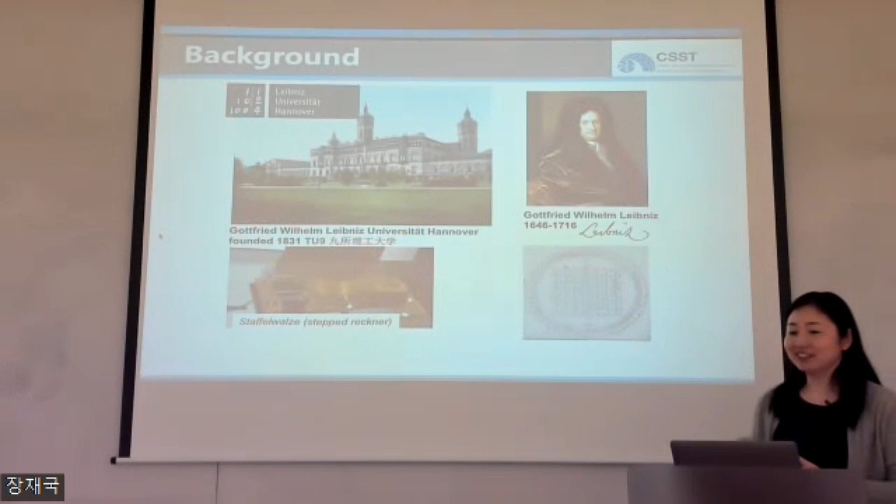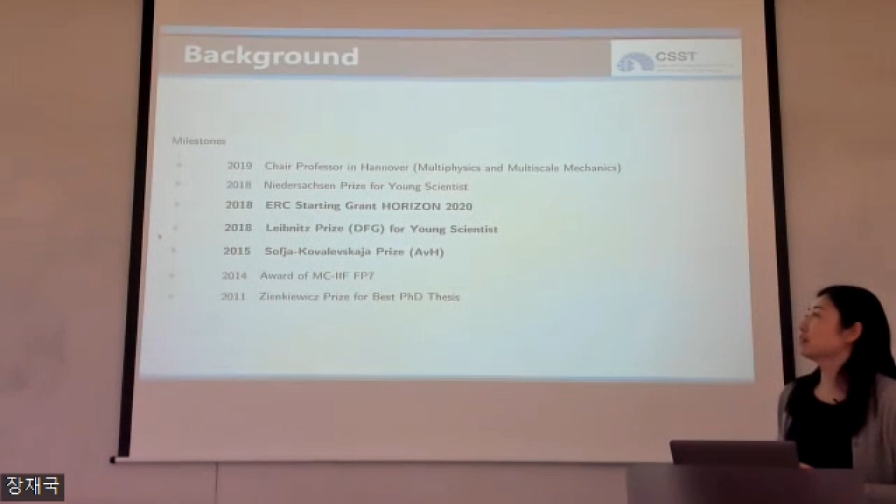About my background, I did my PhD in computational mechanics. I'm always telling my students, even though I'm in the mathematics and physics department, my background is in mechanics, so I'm neither mathematician nor physicist. I moved to Germany in 2015 with the Sofja Kovalevskaja Prize from the Alexander von Humboldt Foundation, and I became professor in 2019. I moved from Shanghai to the UK, then to Norway, and then to Germany.

I have an ongoing ERC Starting Grant on nano-energy harvesters utilizing flexoelectricity and piezoelectricity for self-powered medical implants. So far I've graduated 5 PhD students in Germany. This is a Chinese student, and we had the online defense in hybrid form. And this is my other PhD student who works on machine learning. The isoparametric or parametric machine learning is actually from Ming.

And yeah, if you know Pedro Arias, I don't know. Yeah. Is that him? Oh my God, Pedro Arias. Wow. Yeah, so he came to Hanover. And this is Professor Chen Li from Swansea University, also well known in computational mechanics. Say.

And I'm also supporting young researchers in my group. I'm hosting a Humboldt Fellow. If you're interested in applying for a talent program or fellowship in Europe, there are 3 types. The first is the Humboldt Fellowship from the Alexander von Humboldt Foundation in Germany. The second is the Marie Curie Fellowship, which is also prestigious, from the European Union. And the third is the Newton Fellowship from the UK.

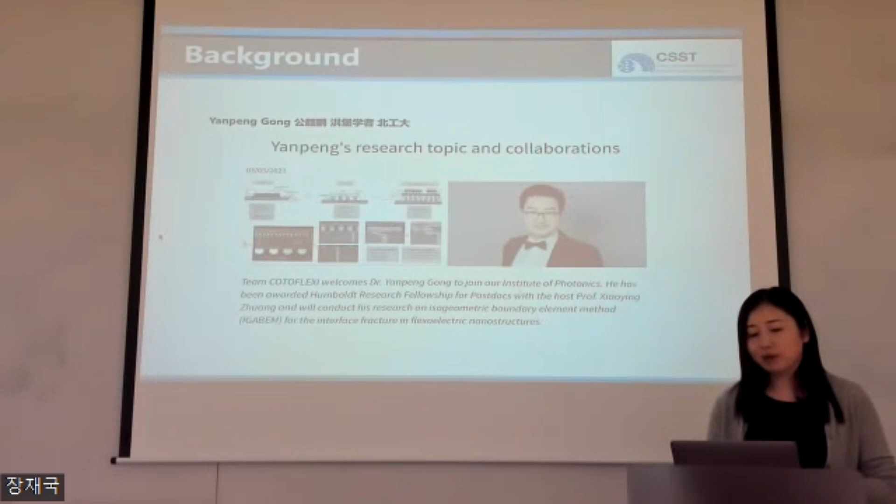In my group, I have one Humboldt Fellow. He's from Beijing Institute of Technology, and he's working on a contact problem with thermal-electromechanical fields coupled together, with the isogeometric boundary element method. I'm also hosting Teresa Cheng. She was originally from Australia, Queensland University of Technology.

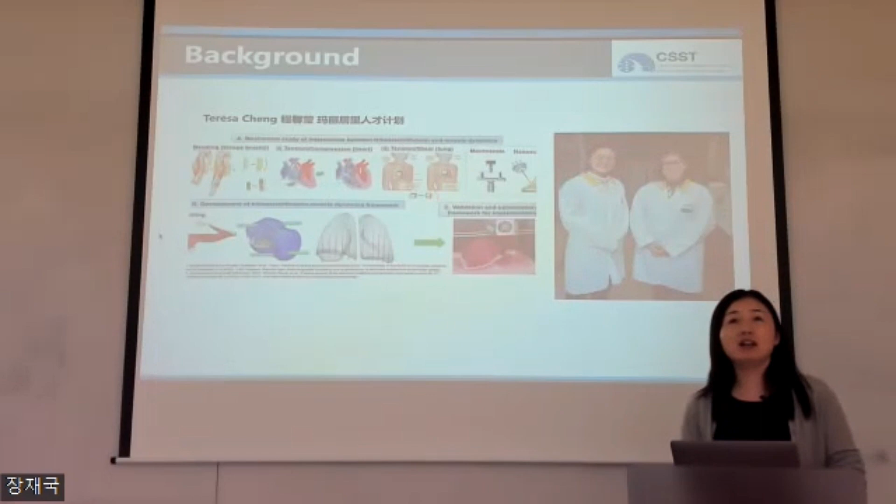She's working on the triboelectric energy harvester, where we can convert muscle contraction and body movement energy and store it in a capacitor through triboelectricity. Her background combines biomechanics, experiments, and simulation. And she actually got the highest score, 98.8, in 2021, and she's in my group.

So I changed my title today because Professor Lee told me he would prefer the metamaterial topic more than the flexoelectric nano-energy harvester, so I was modifying my slides. I want to give you some background. He said that so many people talk about metamaterials nowadays. It is true. But metamaterial is actually a very wide umbrella word, and people talk about metamaterials in very different contexts, meaning actually different things.

If you talk to physicists about metamaterials, they are mainly focusing on the photonic, so electromagnetic wave manipulating, for example, cloaking materials. And that's very different from what we are talking about, mainly in mechanical civil engineering. That's mechanical metamaterials. And if you talk to people working in condensed matter physics, they're actually working on wave attenuation or phonons. So I'm really talking about elastic wave attenuation, that's phononic metamaterials.

And some of the letters are in Chinese because some of them were presented before in a conference in China, and I want to translate it to make the audience understand better.

For the mechanical metamaterials, folks know about it. There's auxetic metamaterials. That means the Poisson's ratio is negative. It's actually a structural effect because there is no natural continuum material that has negative Poisson's ratio. The Poisson's ratio is always positive. When you have negative Poisson's ratio, the auxetic effect is usually coming from the structural effect. So you design a spatial topology, and you have man-made artificial materials that show unusual properties.

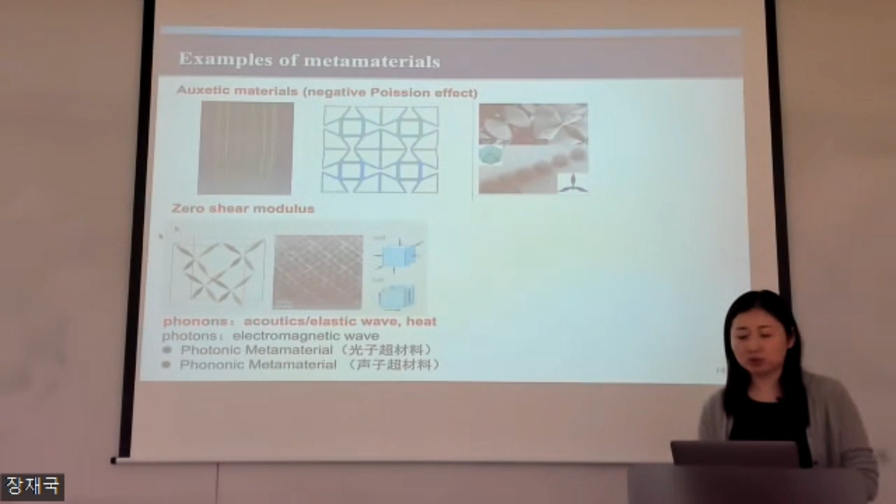You have this hinge that has zero stiffness, and you have no rotation stiffness. So when you give the shear force, it's behaving like fluid. We know that fluid is almost incompressible, and it cannot resist shear force. So it is soft in shear loading. There are many different fields that metamaterials can modulate: acoustic or elastic wave or heat, because heat and elastic wave can both be classified as phonons, while the electromagnetic belongs to the photons.

And this is a review paper from Extreme Mechanics Letters journal, where they gave a review of the different groups of materials, and they showed there's limitations in a bigger picture of different materials, from graphene elastomers to ultralight metallic materials and so on. The traditional materials have a parallel line for their limit for Young's modulus, and there are more graphs, more properties, like also for the tensile strengths and so on.

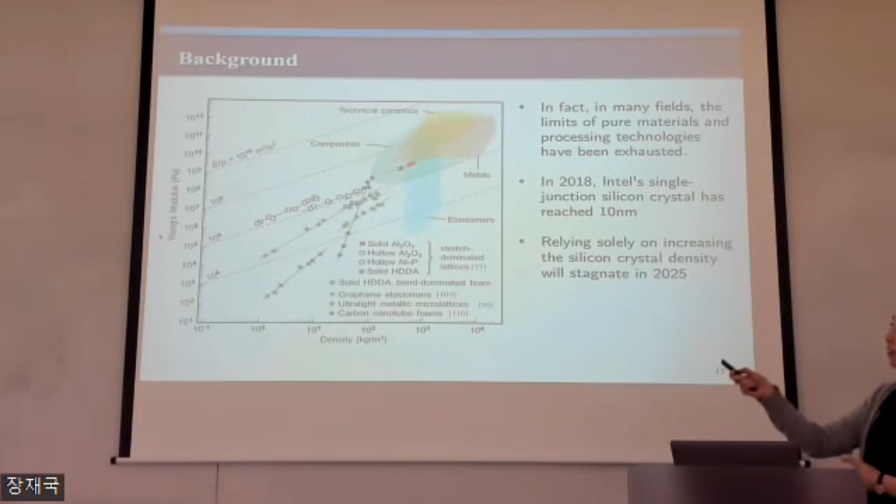So in fact, in many areas, the materials limit has already been exhausted. That's why engineers are trying to go beyond the current limit of materials by engineering materials to find new topology, new features through materials engineering. And this is the case for mechanical metamaterials, like in this review paper. It is the same also for the semiconductor industry.

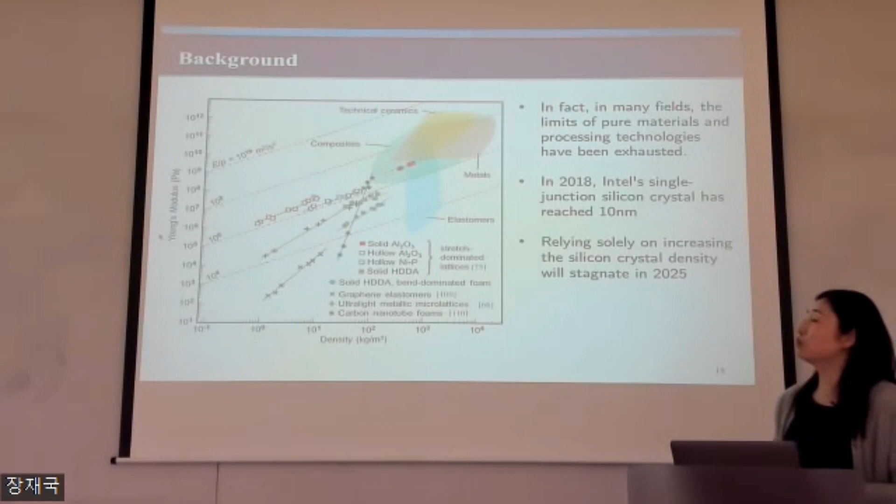There are non-physical rules like Moore's law. Moore's law is not a physical rule, it's just a prediction for the growth of the density of the transistors in the chip, that every 2 years the cost will reduce and the density of the transistors in the chip will double. So the non-physical law governing the semiconductor industry has died out. There is stagnation in development around 2010, and the density of the chip transistors has flattened out. So it's also going to the limit. And the silicon crystals have really reached the manufacturing limit of 10 nanometers.

So for mechanical metamaterials, my group is looking at the auxetic metamaterials and also the phononic metamaterials, including topological insulators. I give the emphasis of this architectured structure because architectured structure was also one of the key areas in the guideline from the National Science Foundation in the US. They listed the key research areas in the future, and one of them is architectured materials.

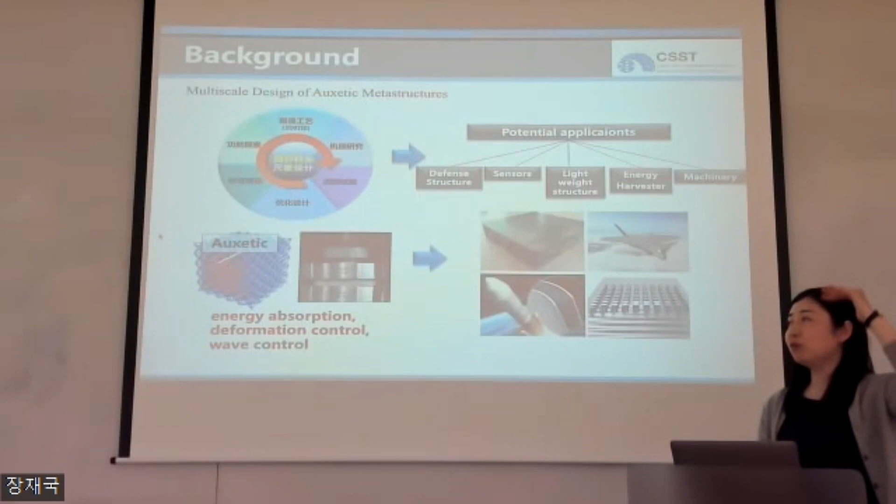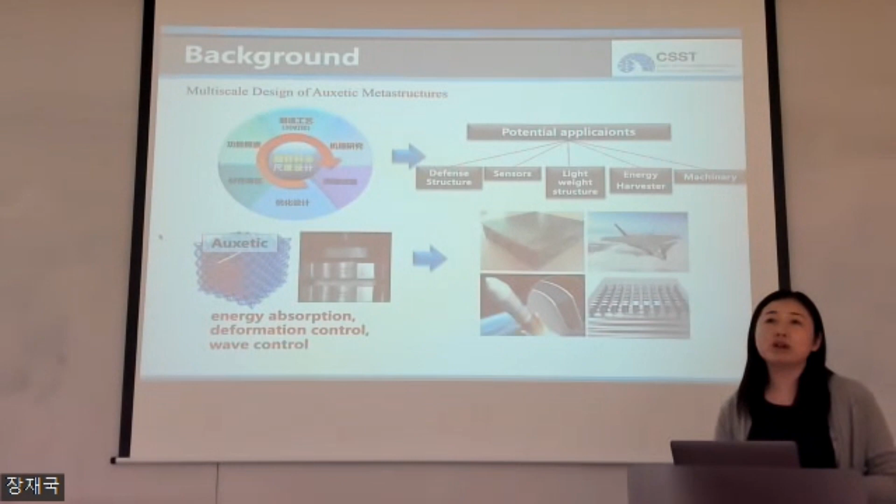For example, you can design auxetic cores in the middle so that you can program the failure processes. It can be used, for example, in energy absorption and deformation control in different structures. You can also use it for wave control or wave attenuation. There are many potential applications for mechanical metamaterials, for defense structures, for sensors. Also, you can enhance signals. You can amplify signals with a substrate.

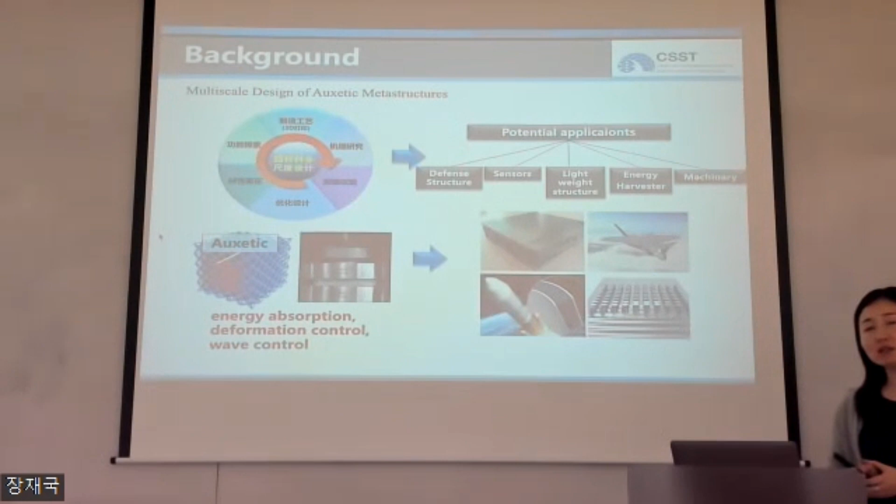And also there's lightweight structures, for example, metal foam, composites, and also energy harvesters. You can try to guide the wave in certain directions so that you can maximize the energy efficiency for energy harvesting. It can also be used for machinery. Indeed, metamaterial development, exploring new metamaterials, is an international trend. For civil engineering, there is also a common goal, and different big initiatives are underway in different countries, also in Germany.

People want to explore new material functions, and they want to reduce the materials, less materials. And also they want to have energy reductions as the international research trend. So you can see here is in Stuttgart, they have been working together with Max Planck Institute, where they want to have the digitalization, Industry 4.0, to automate the lightweight structures.

So they have these woven structures in the middle to reduce the material use and weight for non-load bearing, like you have lots of walls or separation structures in the building. They have a demonstration building, and they also build some lightweight structures in Harvard campus using this new type of woven structures, which is manufactured by robots.

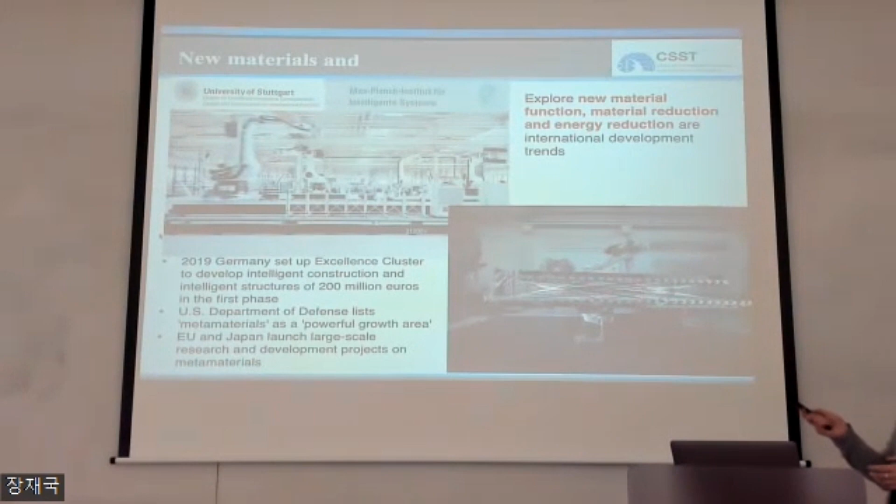So in 2019, Germany set up an excellence cluster for developing intelligent construction. And the first phase like 200 million, and it's extended further for another 7 years. So the excellence cluster in Germany is usually 7 years, another 7 years, and maximum 3 phases. So each phase is between 200 million to 400 million.

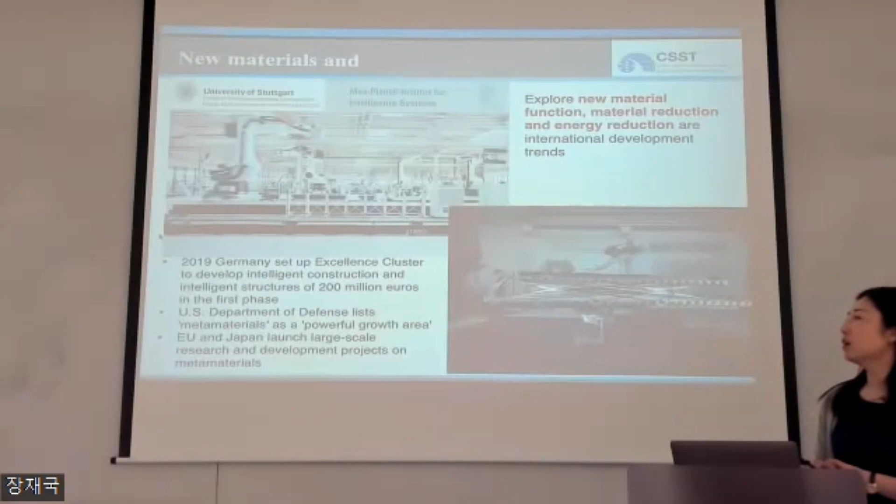Aachen, they also obtained digitalization in civil engineering and architecture for 400 million euros, and they started in 2020. And in the US department, they exploit metamaterials for different structures, and EU, Japan, they all have listed metamaterials as their future key development area.

In this talk, I want to focus on the elastic wave attenuation, with special interest for geotechnical engineering for underground structures. And this is a picture for the underground structure complex in one of the big cities, Hangzhou in China, that's located in East China. So usually in city, we have really limited space for urban development for both above ground and underground. You have so little spaces between the metro line and underground facilities, parking places, and the buildings.

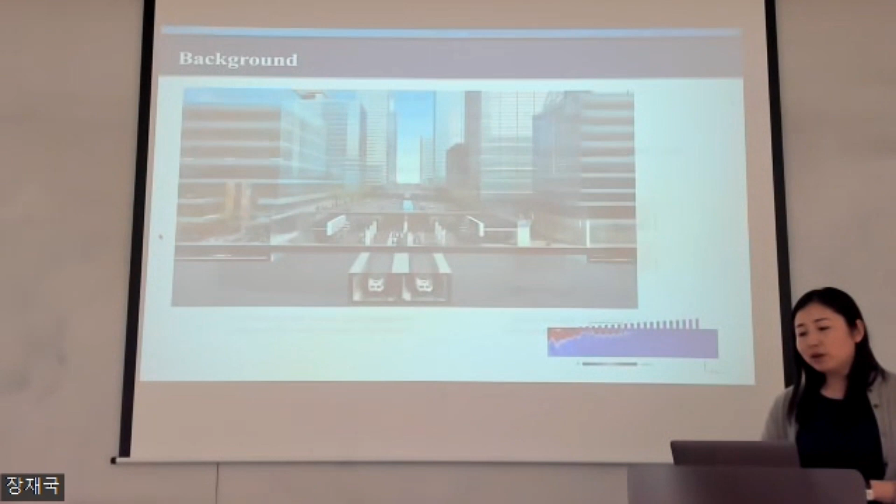And what happens is, when the low frequency wave is transmitting to the buildings, that can cause equipment long-term cyclic damage. For example, for the electric equipment, for the switches, the low frequency vibrations is unfavorable for the equipment reliability. And for example, this is the equipment of atomic force microscope in Peking University. And then the metro line 4 is passing through the campus. And usually the normal function should be like this on the right-hand side.

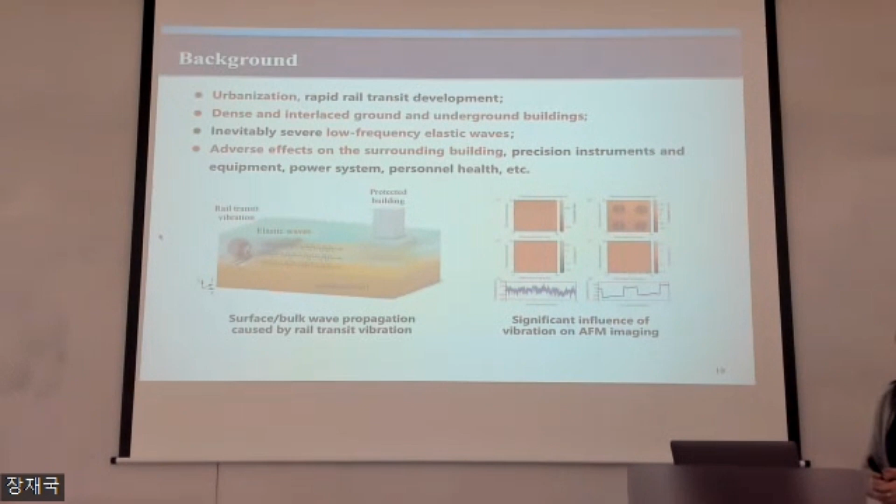Whenever there's a metro line passing by the building, they have billions of high precision equipment that cannot be working anymore because of the low frequency vibrations from the metro line. And we know that the metro line vibrations are usually between 60 to 100 hertz. So on the other hand, you know, the earthquake is even lower, 1 hertz or half hertz. So they all belong to the elastic wave.

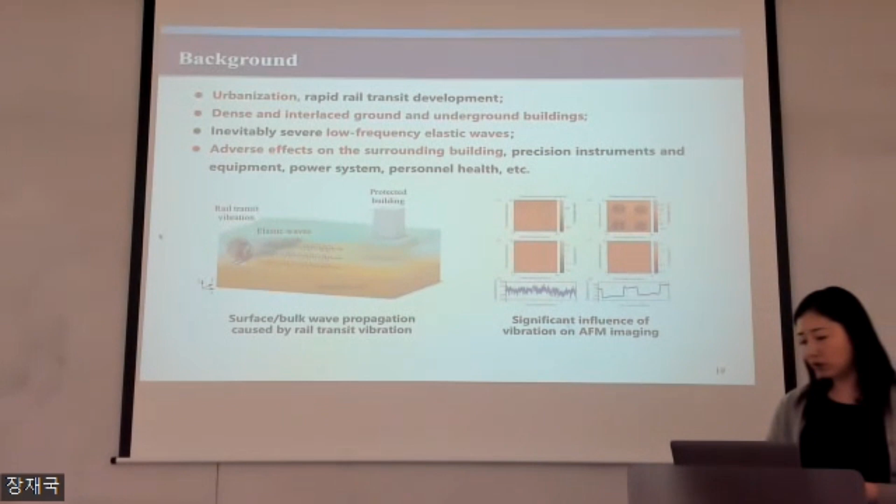So the traditional way to attenuate elastic wave is you open the trench. The traditional way, like filling new materials, is having large volume, but it's really not effective in attenuating low frequency vibrations. They cannot be completely eliminated. So what would be the solution? In the last 20 years, people are looking at the metamaterials. That is actually the sculpture, showing the nature of the sculpture in Madrid.

So what is metamaterials for phononic or for elastic attenuation? Metamaterial is an artificially constructed heterogeneous composite. So it's not natural materials in continuum form, but it is periodic small structures. For example, one unit cell. Usually the size of the typical unit cell is much smaller than the wavelength. And then because of the wave interaction and also the backscattering, the wave cannot pass through certain frequencies when you design the structure in a careful way.

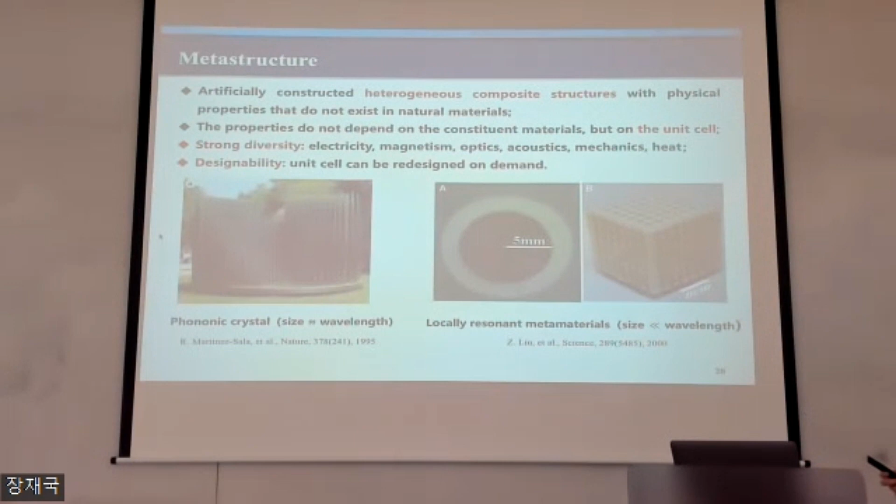So what can it be used for? It can be used for attenuating elastic wave, but can also be used for magnetic, optics and many other applications. So the magnetic and optic belongs to the photonic, and I'm focusing on phononic. And usually the unit cell can be designed on demand, depending on the application background, what's the frequency range.

Actually, people are starting to look at it, like in Switzerland or in Europe, there are many projects, and this is from one paper. They do the site test by putting the periodic pillars, and these periodic pillars are pre-calculated, and they have a target frequency, certain geometry and materials combination, so you can see there is the source of vibrations here, and there is the accelerometer that is testing, and the wave can be successfully attenuated or blocked by the concrete barriers.

So they have the site test, and people are using other ideas, like they want to combine the forest and the trees as arrays, and use this as natural barriers for the wave.

Actually, in my group, we also have carried out the layered soil wave attenuation test. Because we know the soil and the ground have different layers. And the question is, how can we utilize the different properties of the soil? You also have the groundwater, you have viscosity, you have different Young's modulus; they have contrast of material properties. Can we design metamaterials according to the geological conditions to achieve, for example, this band gap so that the wave cannot be transmitted, and at these frequencies the wave can be stopped? You can design it according to the geological conditions.

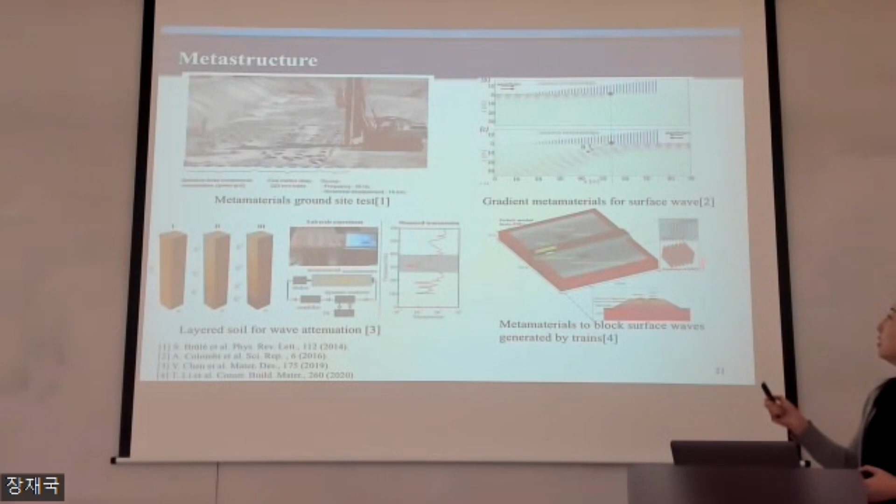So this is the indoor test where we have the accelerator, signal generator, amplifier, and the accelerometer to test the effect of the wave attenuation. There's also gradient metamaterials for surface wave attenuation, so it's a very active research direction internationally. And also metamaterials can block surface waves by trains. The traditional way is you use the spring mass, the spring substrate for reducing the vibrations. Or recently, people also use metamaterials around the foundations of trains for better performance for wave attenuation.

So how does this work? As I mentioned, the metamaterials are of much smaller size compared to the input wave, and then through the band hybridization and also the wave interaction, you can actually generate a forbidden band gap frequency, where the wave cannot transmit through. You can also design the metamaterial in a special way. You can combine two different unit cells so that the bulk of the material is an insulator. No wave can pass it at certain frequencies, but only at the interface the wave can go. It's called a topological insulator. So it's only conducting at the boundary, but it is insulating in the bulk material.

So that is analogous to the photonic metamaterials. You know, the quantum spin Hall effect, that it is only conducting at the edge, but not at the bulk. The photonic analog is a similar mechanism, but they are of different waves. So this is what I mentioned. You can have a larger band gap, more than 100 Hertz, when utilizing material parameters, utilizing layered soil.

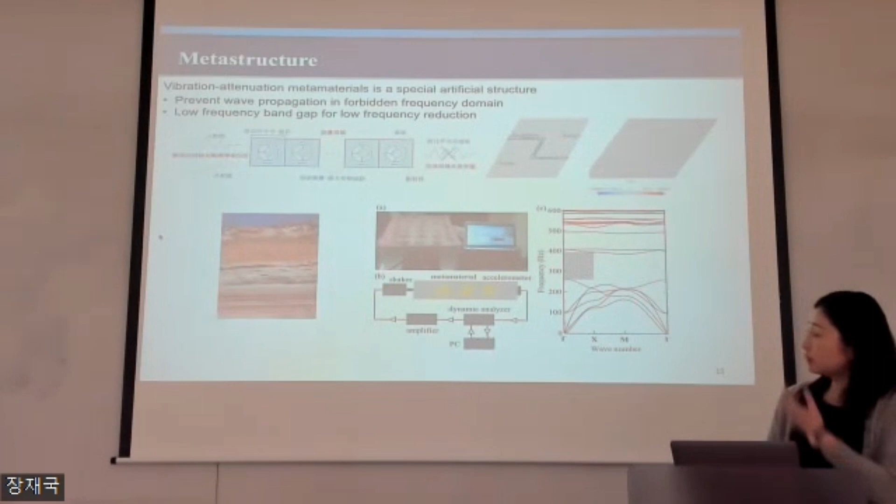So I want to show some metastructures in soil, where in this part we didn't consider the viscosity yet. Later on, I will show you how we consider viscosity. So these are the common materials used in civil engineering. You can have rubber, aluminum, steel, concrete, and with special design, you can compute or test the band frequencies and band structures, what is the band gap for different types of materials. You can also combine them to find new features, and engineers adjust them to locate the band gap exactly in your target frequencies.

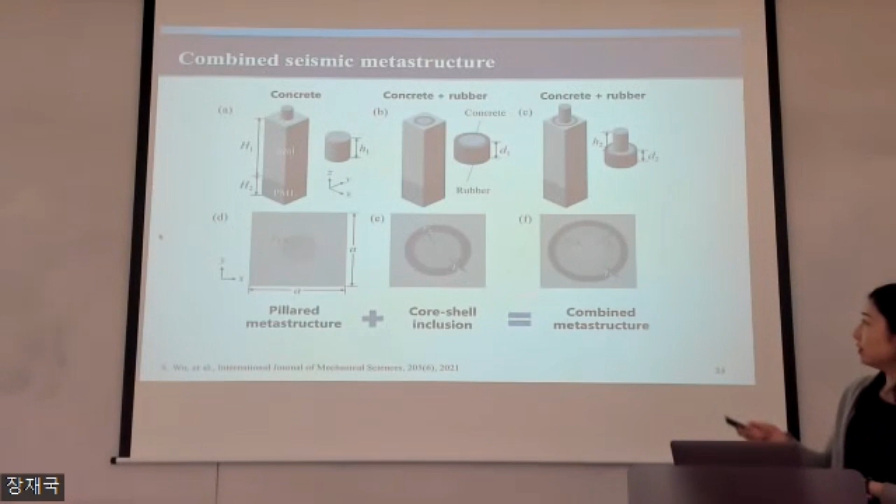For example, this is the concrete, and outside the soil; the second design is concrete plus rubber, because rubber has the damping effect. And the third design is we combine the first one and second one together. We have the concrete with rubber. Rubber is the outside confining layer, and the concrete is the top pillar. And you can play around with the parameters D2 and H2 that will change the band gap frequency range, and it will also change the band gap width. So in this paper that we published in IJMS, we combine these two together so that the performance reaches our targeted goal.

I want to introduce the concept of the unit cell, and this is the reciprocal space. Before, we had the unit cell in physical space. You have triangles, square, whatever, circular, and then you need to map this physical geometry into the reciprocal space. And this irreducible unit cell is mapped into the Brillouin zone. And then the wave transmitted in the unit cell is described by the wave vector. And the wave vector, in this case, for example, is gamma, X, or M. And this is the wave vector in the kx and ky directions. So the unit cell width is the inverse of the Brillouin zone size in the reciprocal space.

And then this is the wave vector showing the band structure where you have pillars as the first design. So we have relatively narrower, relatively higher frequencies. And then the second design is the concrete combined with the rubber. You have a little bit narrower band gap. And then when we combine the two designs together and change the height and the thickness for the lower part and the upper part, we can locate the band gap in the lower frequencies, which is lower than 10 Hertz.

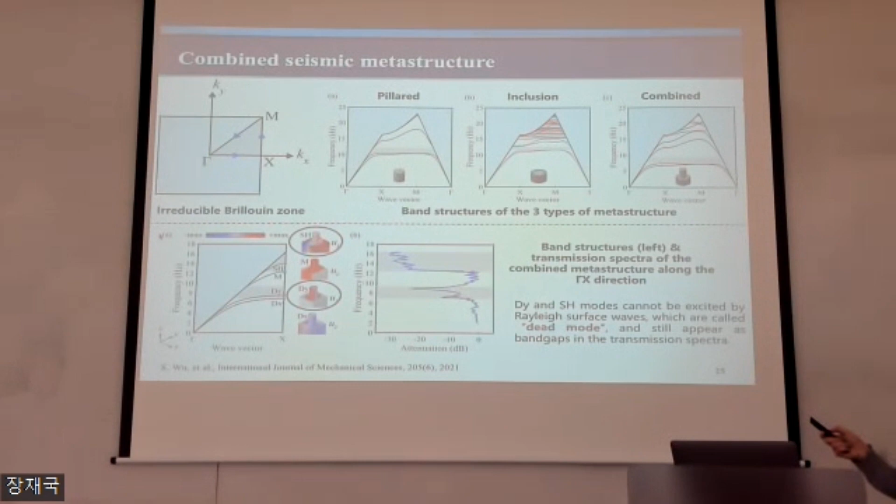It's between 5 to 10 Hertz because most of the wave in civil engineering is in the low frequency range. And then you can have both the wider band gap and low frequency ranges by trial and error. Of course, you can introduce machine learning by parametric study. We have also a paper on this.

We can do the inverse design based on demand. It is different from Timo's talk, which is based on physics-informed neural network. It's purely data driven. You can train neural network to realize the inverse design. In this combined design, we can detect the wave vector change with respect to different frequencies and different mode.

You have the DY, the X mode, and you also have the SH mode. So for the surface wave, for DY and the SH mode, they cannot be excited by the Rayleigh surface wave. These are dead mode, but nevertheless, they can appear in the band gaps that will reduce the transmission of the wave. So that's very interesting.

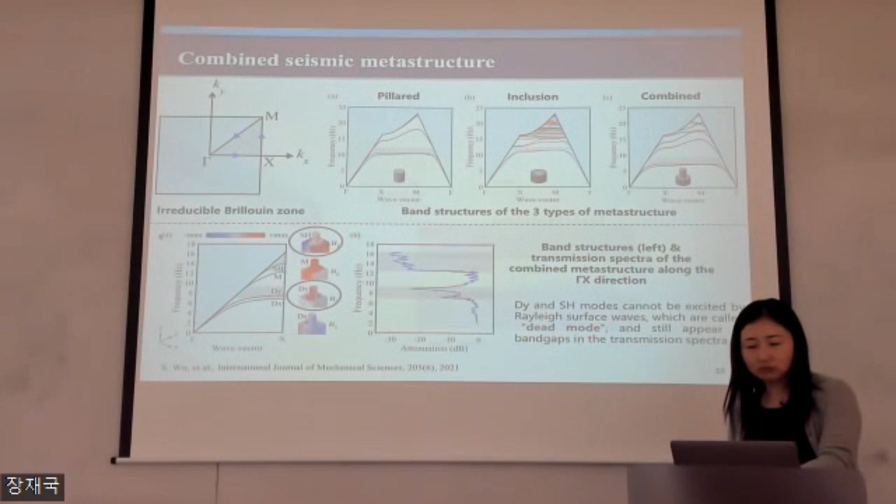And we will find that something more interesting is if we change the height of the pillars. So what we call the gradient metamaterials, and we can find that the incoming wave has asymmetric properties when the excited wave from the left-hand side and right-hand side, they can be attenuated, but at different stopping pillars.

For example, the incoming wave from the left will propagate a few pillars, while the incoming wave from the right will stop at the third pillar. So here shows the contour plot of the elastic energy field.

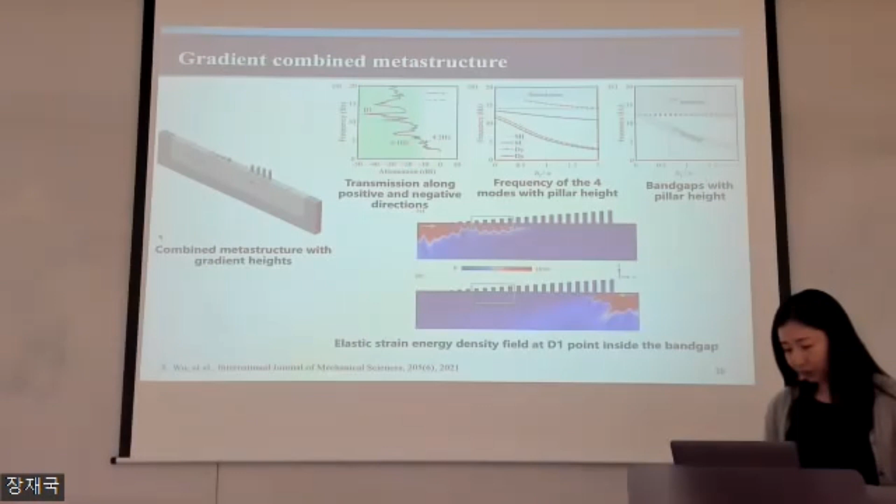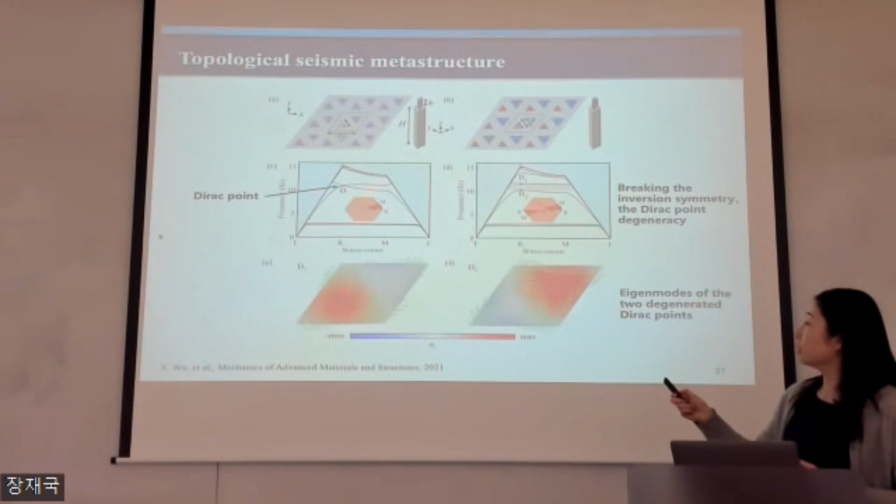And if you break the symmetry, you change the size of two neighboring cells. You will break the symmetry and generate the band gap. And that is eigenmodes of two degenerated Dirac points. And then when we change the symmetry, you can have a band gap. In utilizing these properties, you can play with the size of the unit cell so that you can change the location of the forbidden band or band gap from higher to lower frequencies.

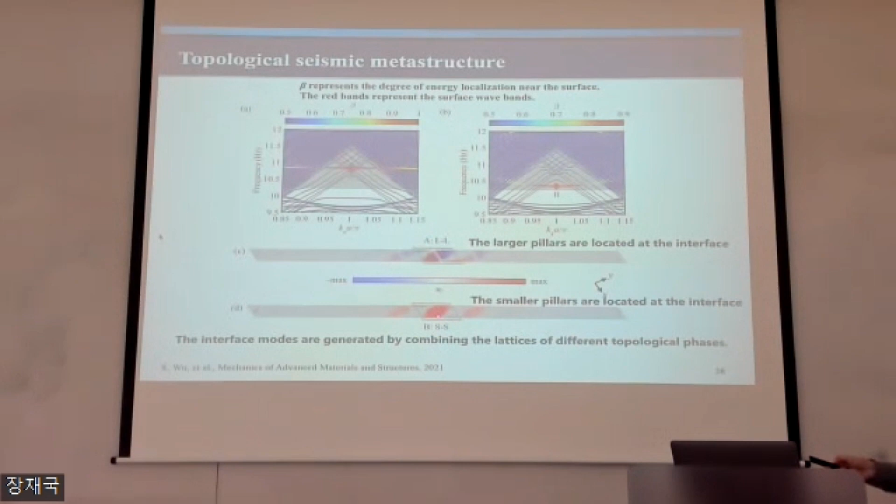And also you can change the size of the pillars. If the larger pillar is located at the interface, you have different higher frequencies. And when you have smaller pillars like here, SS, then you have the lower frequencies at the interface. And the wave is only propagating at the interface, and above is insulating. And then here is a simulation that can be done in COMSOL if you're familiar with it.

So that means if you have some structures you want to protect, you can design metamaterials as barriers so that when there's incoming wave, the structure will be protected and the wave is only propagating along the interfaces. On the other hand, you can also harness energy, which is very interesting. You can put piezoelectric or flexoelectric.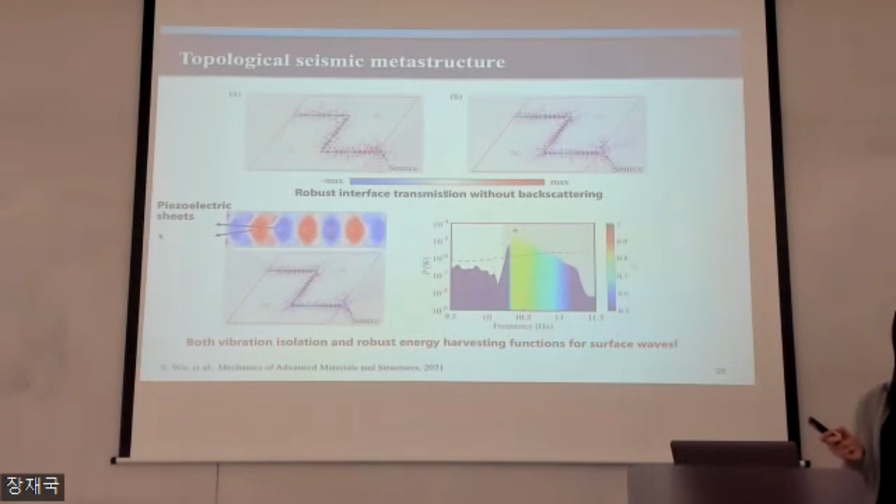And you can put the energy harvester at the interface. As I mentioned, you have two cells, right? At the interface of two cells, the wave is propagating. And you can put the piezoelectric patches along the interfaces so that you can maximize energy harvesting efficiencies. From our test, you can get 70 or 80% of the energy when you put the energy harvester along the interfaces.

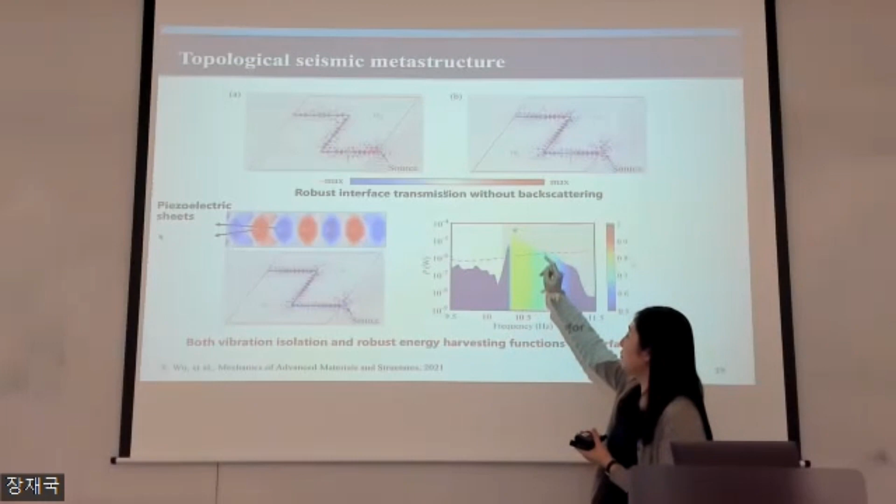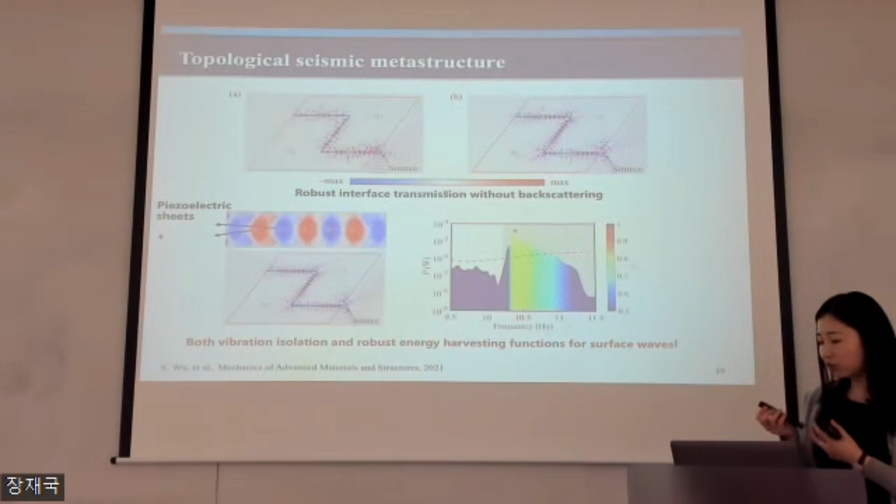And here you can see one drawback is it's quite sensitive to the frequency range. When it is 10.5 hertz, we have the maximum power density, but it goes down quite quickly with the change of frequencies. Ideally, you want to have wider frequency ranges. What you can do is you can combine different types of metamaterials together along the path. We also recently conducted studies on that to have wider frequency metamaterials.

As I mentioned, metamaterials, you can design it for the interface mode by breaking one Dirac cone point. You can also have more stable, defect-immune topological insulators by designing an analog to the quantum spin Hall effect, where you have the four-fold degeneracy Dirac cone point, because that will generate the spin orbit coupling at the interface mode.

So one way to do it is you can break the symmetry by introducing deformation. For example, the original unit cells, you have rubber or concrete, they are symmetric. And then if you increase the pressure or use other ways to change geometry, and reduce diameters of these unit cells, you can actually...

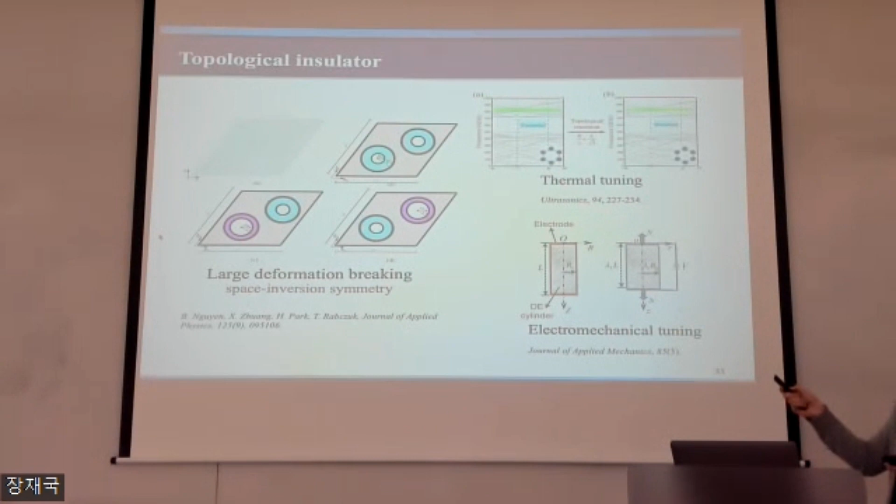Induce the space reverse symmetry, inversion symmetry, and by this way you can also design metamaterials. Actually, the topological insulator is not only used for the elastic wave, it can also be used for other types of wave. You can tune it from a thermal wave, or from an electromechanical wave. For example, you put some piezo electrodes here, you can apply an electric field to expand and change the topology of the cell.

So this is like we designed two inversion symmetries of the unit cells where we have a center source of vibration. And then we put defects along the paths. You can see the wave propagation still robustly goes through the interfaces and is quite immune to the defects. We put 2 or 3 unit cell lengths along the interface with defects, so it's immune to back scattering and robustly propagates along the interface.

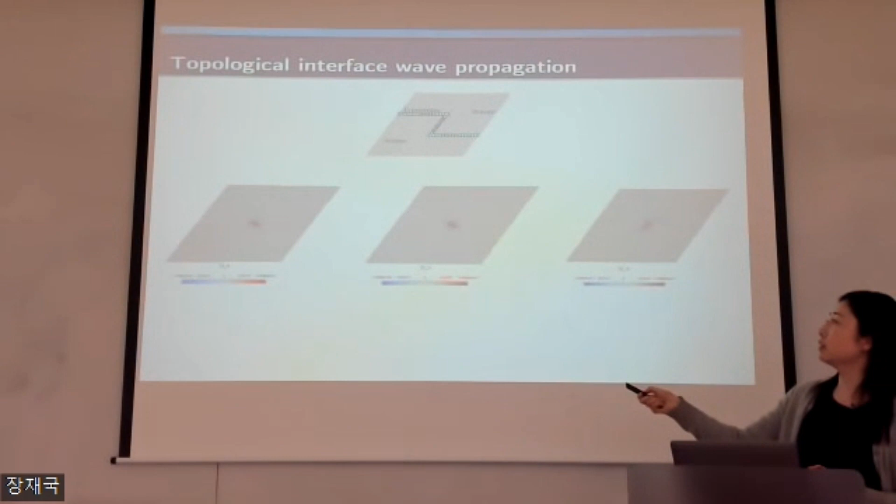What's the size of the problem? Dimension size. This size of the problem is centimeters, unit cells centimeters. And then you can see that we have many unit cells here, so it's like meters scale.

And the problem is when you change the unit cell size, when you reduce the size, it's softer for high frequencies. When you want to go for lower frequencies, you need to make it larger sizes. So that's also a common problem for civil engineering. You need bigger unit cells, which wastes lots of materials. So the question is, can you design smaller unit cells as a barrier, but for lower frequencies?

This is the work we have done for the topological insulator with level set topology optimization. So the one I mentioned before has only one Dirac cone point for the degeneration. If you want a more robust topological insulator, you need 4-fold degeneration. That is the quantum spin Hall-based topological insulator. This would need lots of education in physics about what quantum spin Hall-based topological insulator is — I'd need another 45 minutes to talk about it.

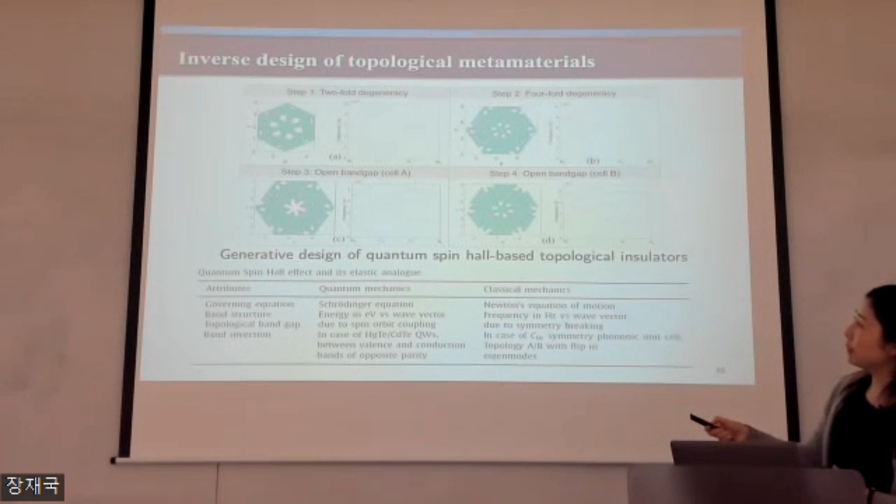But the general idea is we want to use the level set method — perhaps you know it, it's a topology optimization method — to set up the objective function. For example, we want to first have 2-fold degeneracy at one point in the wave vector, and then use topology optimization to generate 4-fold degeneracy at a second point. And then we want to further open the band gap, also with topology optimization, but only changing the middle cell. This unit cell, when you fold it outside, is an extension of this unit cell.

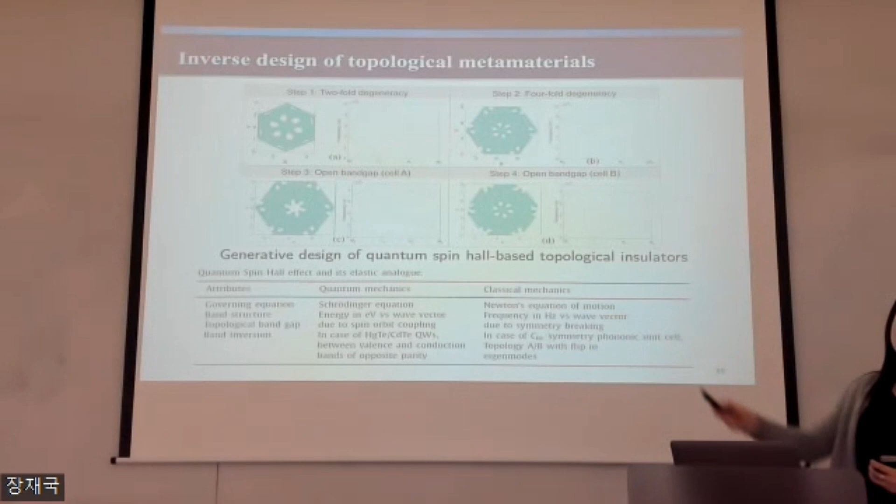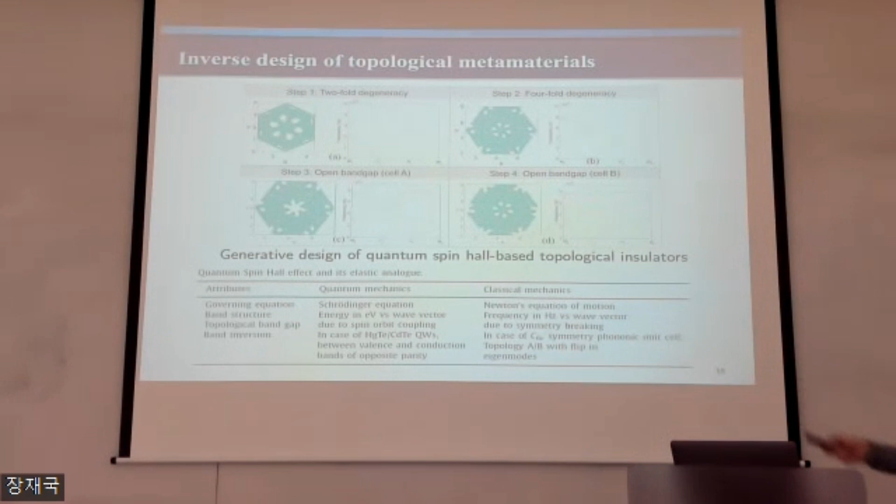You can see it, there's a zone folding theory for that. And then the middle part is further topology optimized before reaching this topology, and you optimize it to open the band gap. So the objective function is to maximize the band gap, and finally to have the maximized passing band. So when you put these unit cells together, they have the interface mode.

So this is the procedure. We have first the objective function J1, which is to move the first mode upwards, and J2 is to move the second mode downwards. And J3 controls making the degeneration point, so J3 should be minimized so that the first and second mode — for example it can be third or fourth mode, doesn't matter — so two modes can be minimized at one point and degenerated.

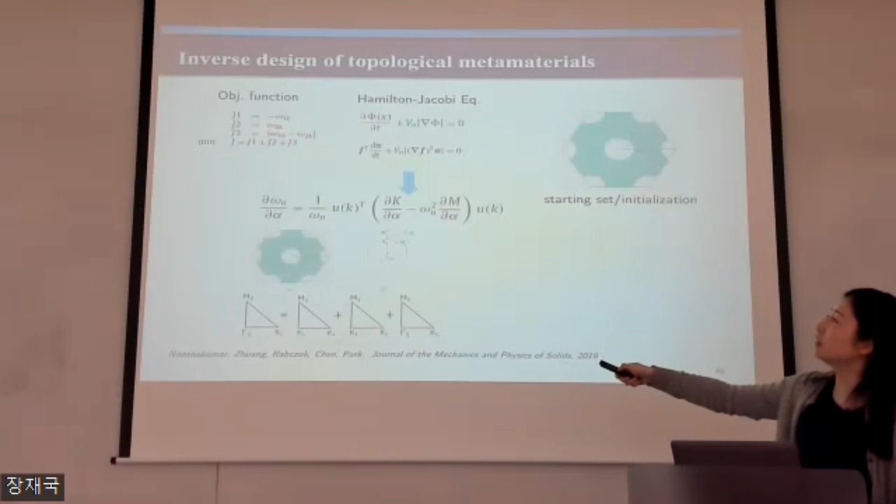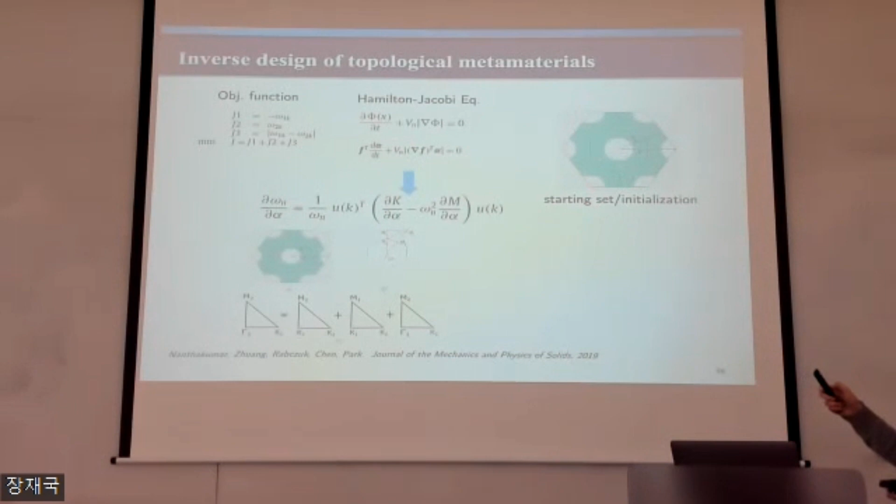So this is the objective function where we are optimizing omega with respect to alpha, alpha being parameters from the radial basis level set method. So this is our initial geometry, and the final geometry is what you see before, with this complex topology.

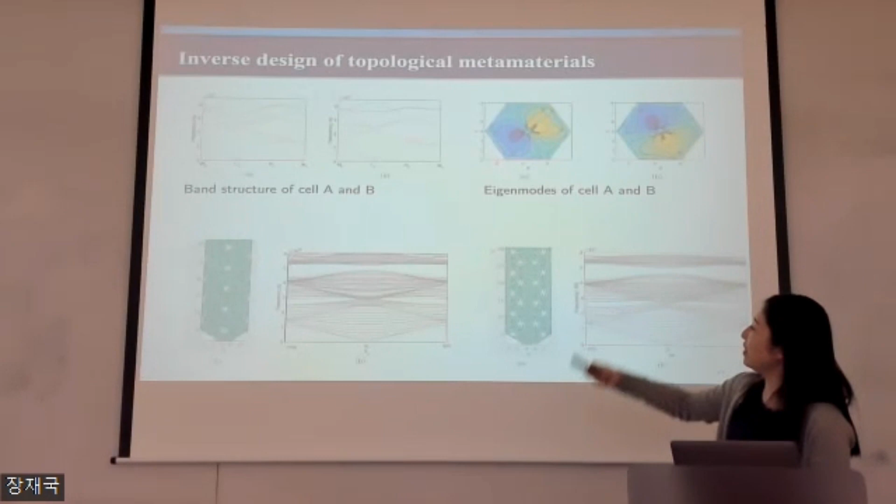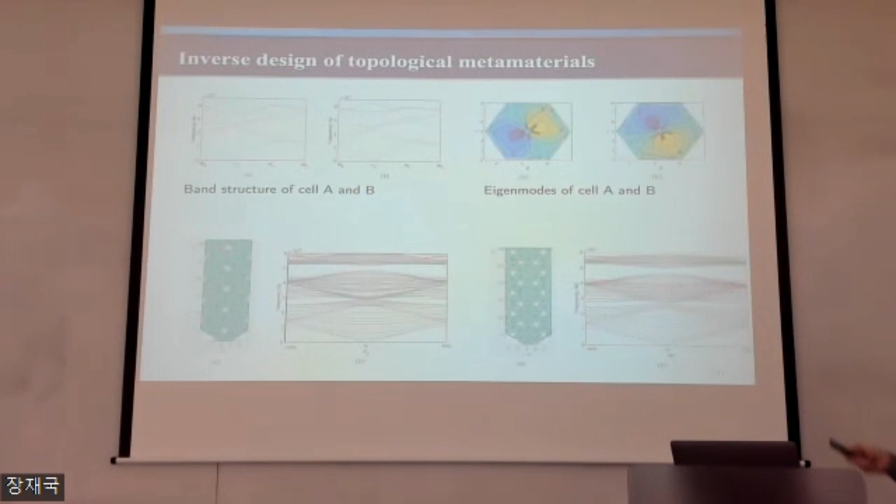And then you can have supercell A and supercell B. This is a repetition of unit cell A, and this a repetition of unit cell B. We call this a supercell. The supercells have the same band gap and very similar, almost identical band structures. But when you tessellate A and B together, for example here it's AB and AB, they are chiral.

Chiral means it's direction dependent. When you have the incoming wave, for example from one side, because we have spin-orbit coupling, and A is on the right hand side of B, it can propagate.

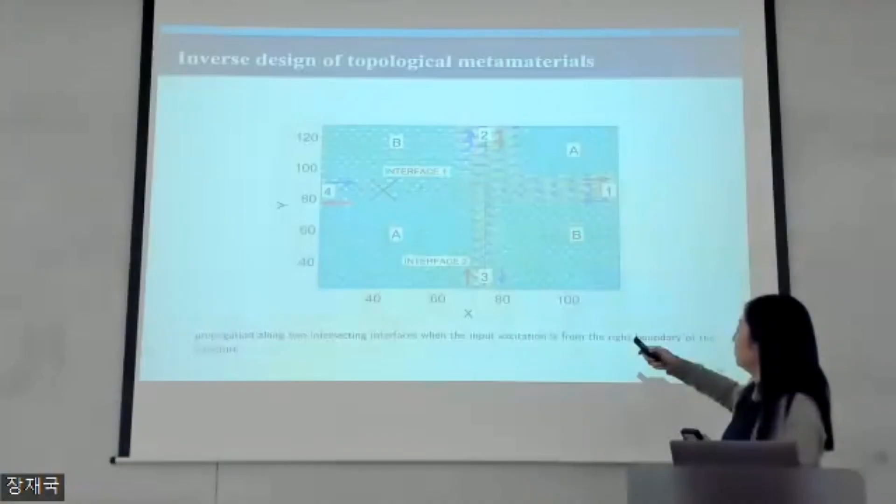Because you speak so fast. I don't know what's the problem here. Right, maybe I shouldn't use the pointer.

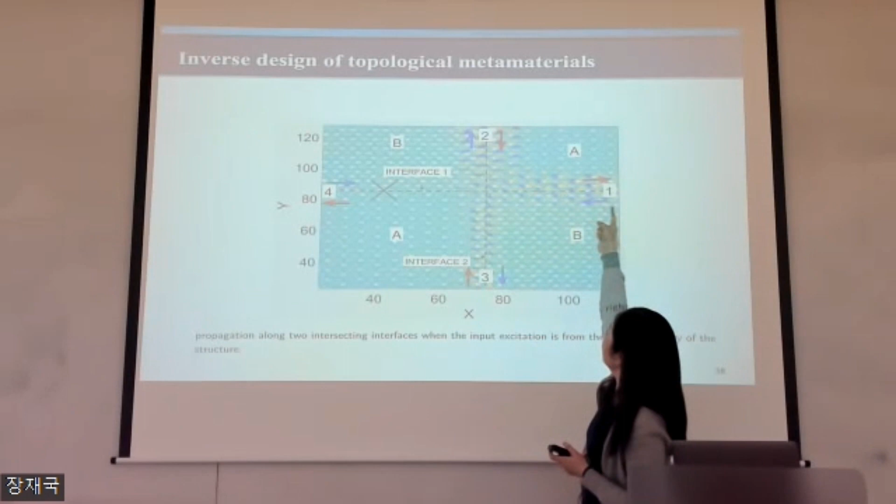Because the wave is propagating this way, it will not travel through in the other configuration. It only travels along the interface where A is on the right hand side of B. So along this path where A is on the right hand side, it will go and it will turn. It will stop at this interface because along this path A is on the left hand side of B with respect to the wave direction. So that's very interesting.

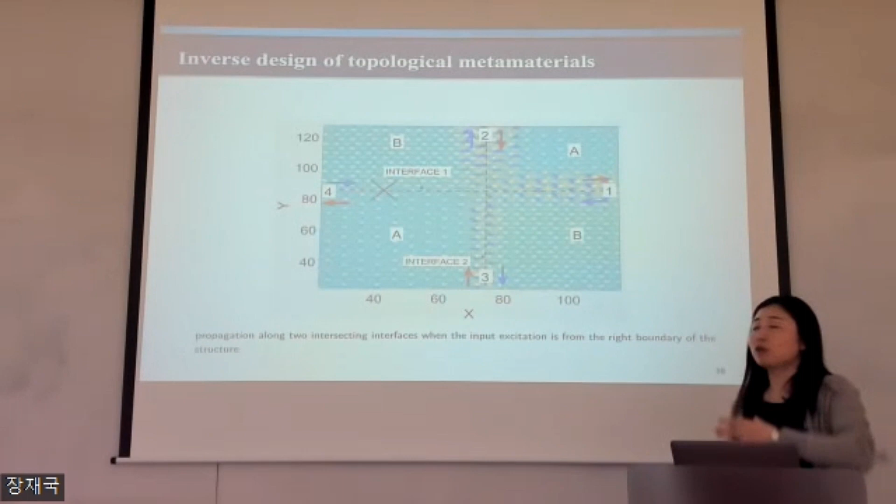You don't get these properties when you only have two-mode degeneration. The two-mode degeneration is not quantum spin Hall-like, they don't have spin-orbit coupling. It only gives interface properties, and the wave can go in both directions. Only the quantum spin Hall effect has the spin-orbit coupling that makes it chiral, so the wave will stop at this interface and return. That's very interesting.

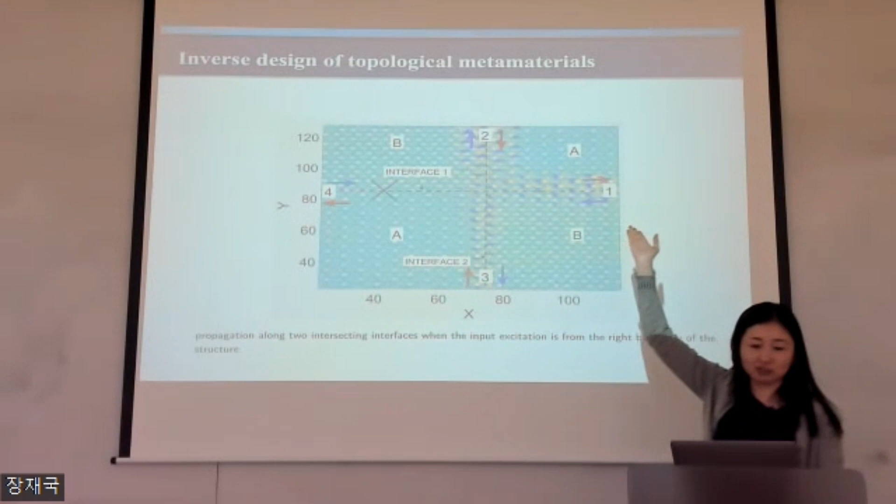Okay, the other question is in civil engineering, it is not only the frequency that is important, it's also the energy. For example, you design a metamaterial that can stop the wave at certain frequencies, but when there is lots of energy, the metamaterial will be destroyed. So the question is, can we design metamaterials that not only work at the frequency we're interested in, but also absorb more energy?

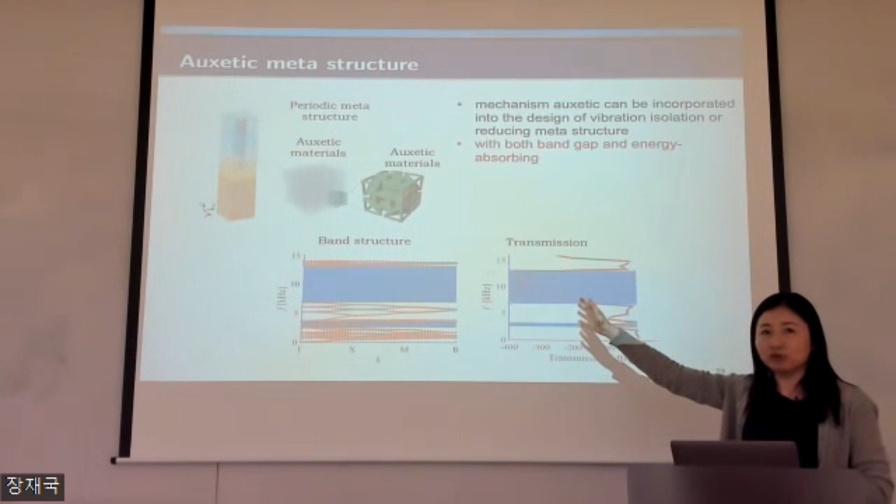So the idea would be, can we combine the advantages of auxetic metamaterials that can absorb more energy and undergo more deformation, and combine that with the band structure wave attenuation properties of materials. So we are trying this now. With certain designs, you can have band structures at, for example, low frequencies around 10 kilohertz that can stop the transmission and absorb most of the wave, but can also absorb the energy.

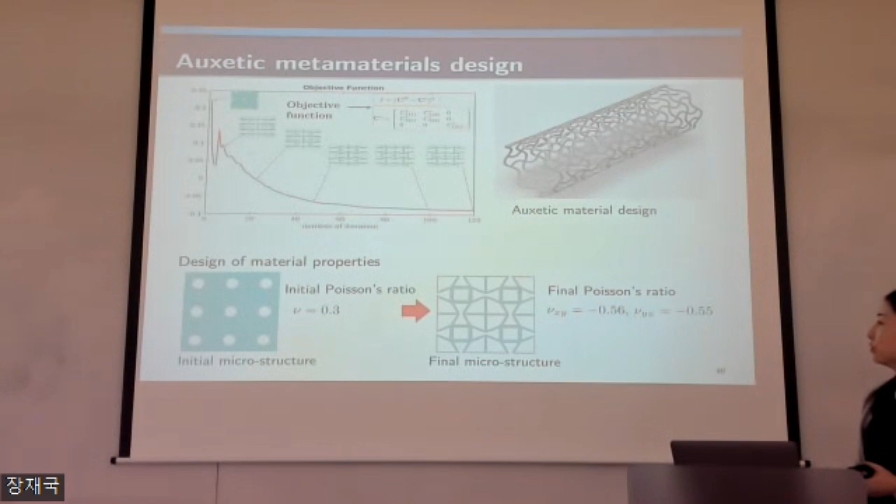So the unit cell I mentioned before, for auxetic materials, we have a unified topological optimization procedure both for 2D and 3D, and this paper is on CMAME. Whatever auxetic properties you want, it can be anisotropic. You can have auxetic materials with different Poisson's ratios in different directions. I can give you the topology that matches your objective Poisson's ratio.

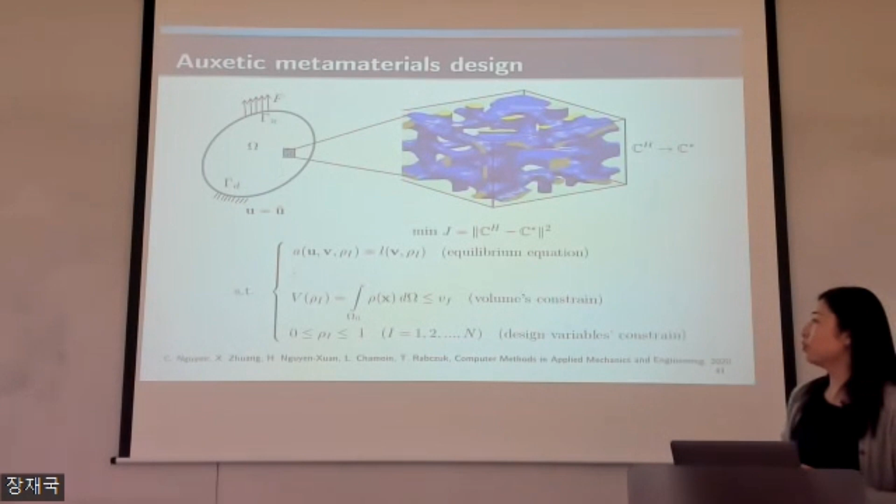So there's a final microstructure, and we can also do it for 3D. You have the objective function for the elasticity tensor, where you specify the objective Poisson's ratio in different directions, and you also control the volume constraints. You have the governing equations, and this is the 3D one where we get the final topology like this, with anisotropic properties.

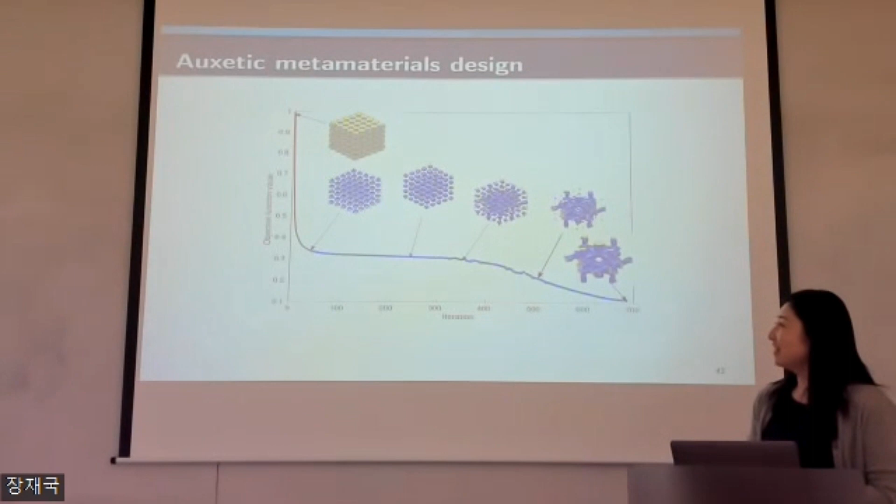The blue line shows we use model order reduction. This shows the different topologies where the level set method is quite robust in evolving into anisotropic auxetic materials.

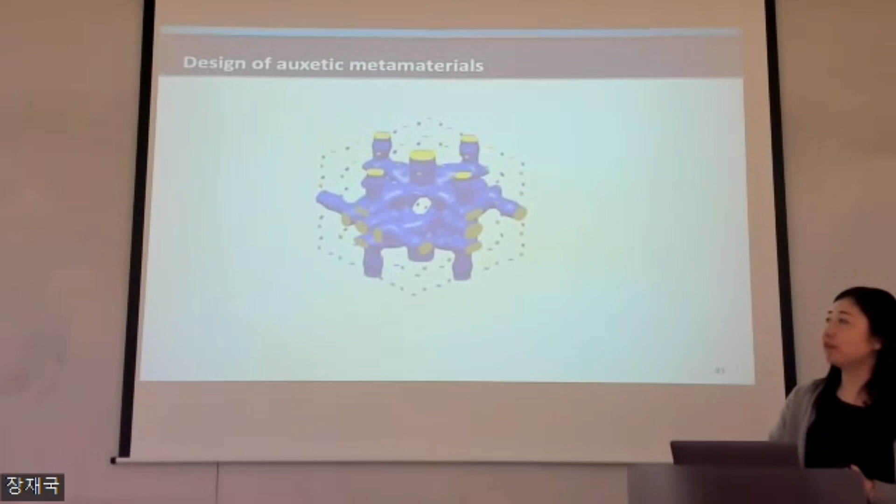Finally, when you want to print these materials using the STL file, you don't have a very smooth description of the geometry, you get inaccuracies. That's why we use IGA here, to keep its original curvature smoothness.

After you print it out, you actually realize it's not exact because of errors in manufacturing. So there's also a problem with metamaterials: what you modeled and simulated in the computer is not finally what is performing. Because when you make it straight, you can see the rotation degrees of freedom are missing. But actually, that's the key for the structural effect when you want to obtain auxetic properties.

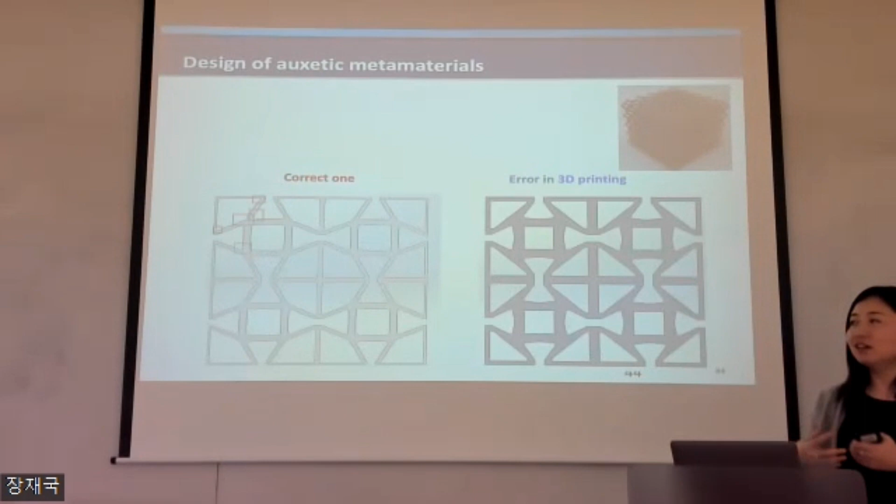So I want to emphasize that in the future you may need a digital twin that can observe where the source of error is coming from and correct the error in manufacturing, have a learning curve, and then compensate it in your digital model, because there's always error in manufacturing. There's also a recent paper from Xiaoying where he used artificial intelligence to compensate for error in 3D printing, due to temperature, particle size, and so on.

This is very interesting. I think I've talked enough about the previous metamaterials. All the metamaterials I showed before, we don't consider the viscosity. But soil, when it has water in it, actually has viscosity. So we know you don't need to consider damping for steel or aluminium, but that's not the case for soil. Concrete is okay, but for soil you need to consider the viscosity.

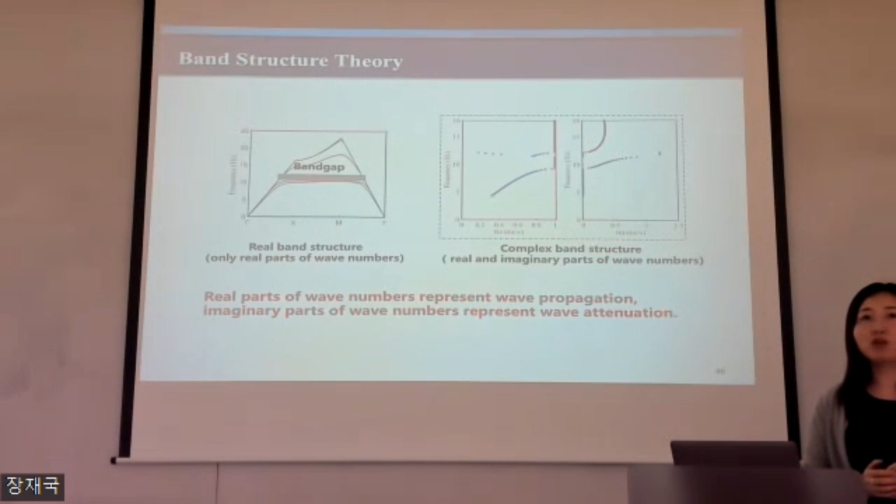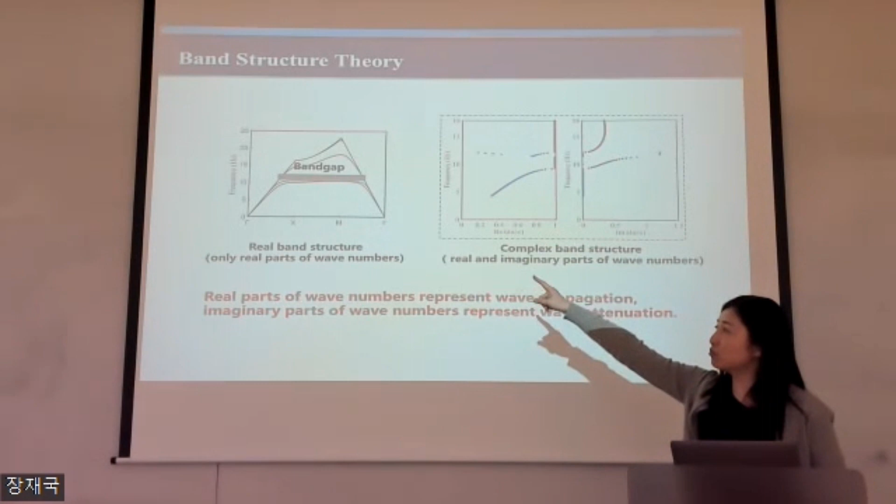So we need to rederive the equations, considering complex parts. The governing equations will consider not only the real part—before, all the band structures only considered the real part. You need to consider the real and imaginary part of the wave number because you have energy loss.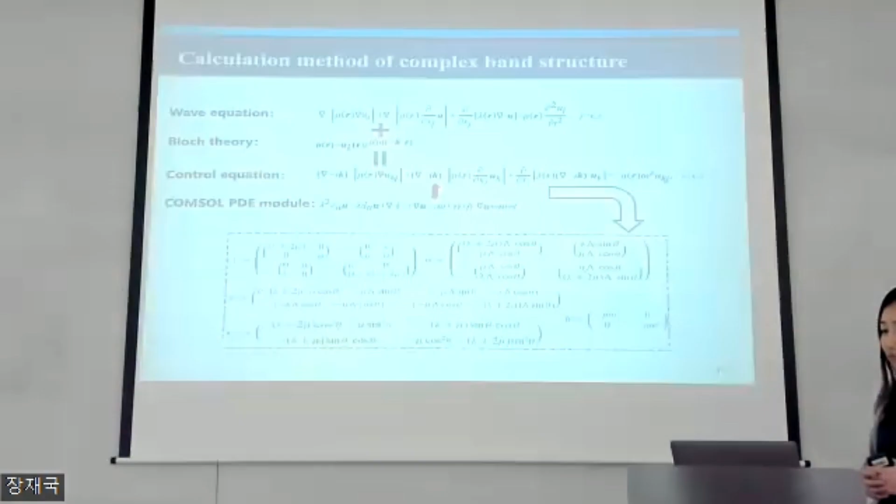So here, without going through all the math, I show the wave governing equations. You have the imaginary part, and this is Bloch theory where you look at the frequency domain. Here are the governing equations, resolved in terms of PDEs. So it's actually quite easy for a PhD student to start with that.

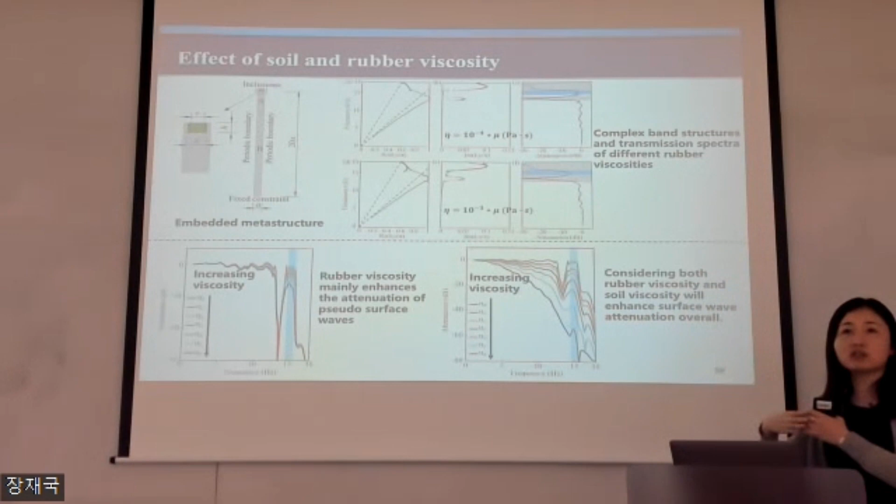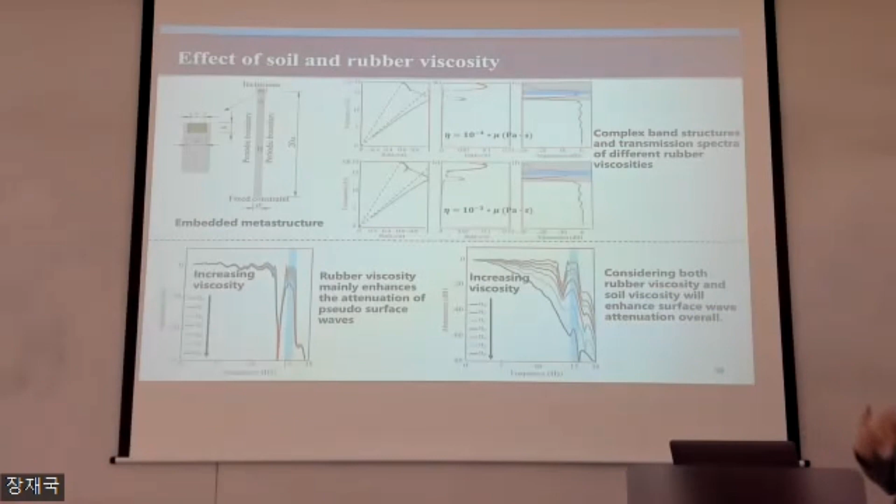Here shows the effect of the viscosity. When you have complex band structures, the transmission spectrum is very different from the pure elastic case without considering viscosity. When you consider both rubber viscosity and soil viscosity, with increased viscosity you can actually expand the range for wave attenuation. So that's an advantage when you want to design metamaterials for surface wave attenuation.

Now, recently we are also doing indoor model tests to verify our experimental results with shaker, signal generator, and power amplifier. We have quite good agreement between experimental results and simulations. This part has not been published yet.

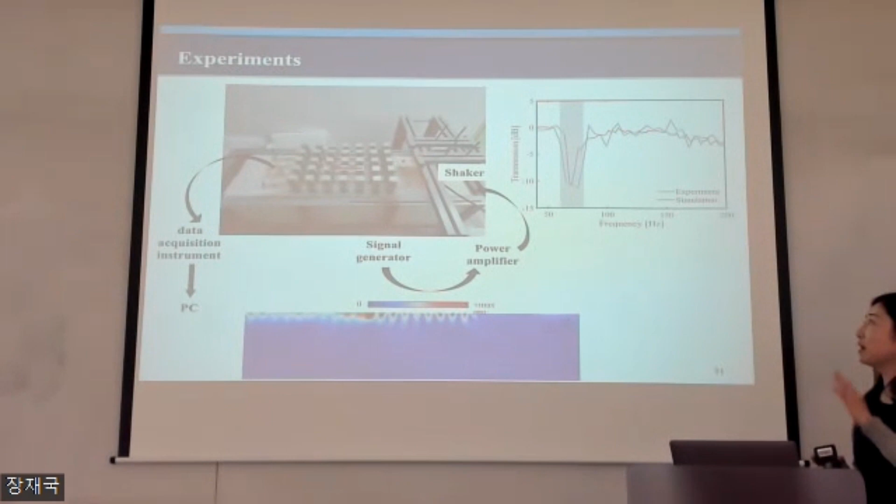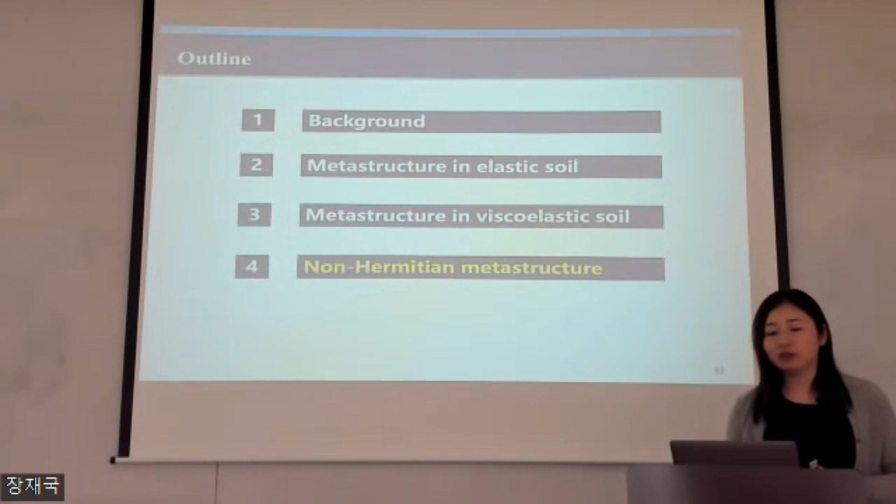And finally, the last part is also very interesting—this is working with physicists on non-Hermitian metastructures. We know any system that exchanges energy with the external world is a non-Hermitian system, so it's not ideal. One question is, as I showed before, when you have different incoming wave conditions, the attenuation function is very different. Can we have a metastructure that attenuates waves robustly, independent of the position of the incoming wave?

To realize this, one solution is to develop a non-Hermitian system considering the gain and loss of the system. You can have a pair of forces, like on the left-hand side, and the opposite one is the loss one. The gain one leads to the negative imaginary part of the eigenfrequency, and the loss part leads to the positive imaginary part of the eigenfrequencies. So you can have velocity-dependent forces dependent on the input wave velocities.

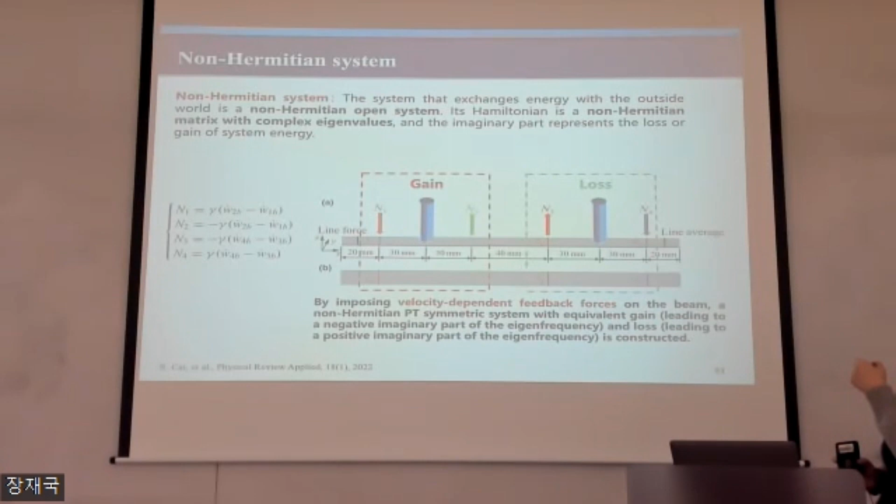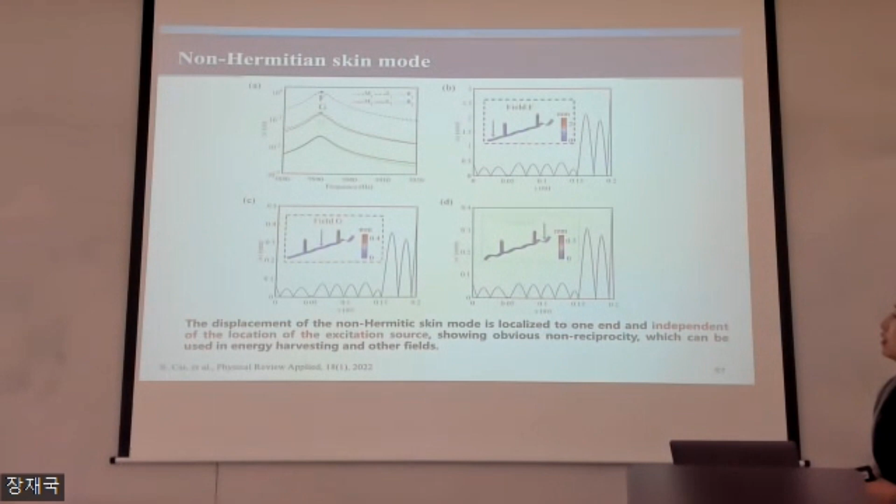You can adjust N1, N2, N3, and N4 as a pair. So this shows that when you generate different pairs of forces at different locations, like F, G, and H, you can have similar attenuation functions that are independent of the excitation forces.

Having talked so much, I think metamaterials are quite prospective. They can have lots of applications for civil engineering, but it's still in the infant stage. Lots of tests are indoor, and for substantial applications there are many factors we haven't considered yet—heterogeneity of materials. Soil has a lot of heterogeneity, and you can also have inclusions and other particles, which isn't considered in the model. Also, in reality the frequency of sources is changing; we are only targeting a small range of frequencies, but input source frequencies can have a wider range. So there's still a long way to go before it can be commercialized and used for practical applications.

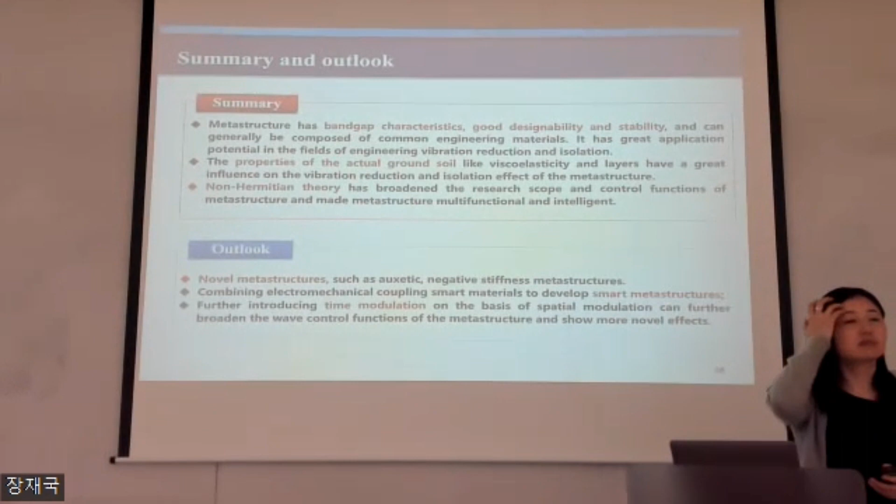Question. By the way, I realized that you are so flexible. Sorry? You are so flexible for my request to change this. Because I changed it quickly for you, because some slides are in Chinese. I didn't complete it yet. Yeah. All right. Thanks a lot.

Do you have any questions? Great presentation, giving me a lot of ideas. Great. Thank you. Okay. No questions.

Actually, I asked her to present this subject because we have a big issue regarding the sound transfer between different stories. This is a big social problem. People are talking about how to control the sound transfer between the different stories. But of course, only increasing the thickness of the slab is not helping. Yeah, you need to have special materials. That's why I asked you to provide some clue for such kind of solution.

And my colleagues have actually patented something. They reduce the noise in the big turbine, for the airplane, by 20%. They tested it in the western part of China. They have very special topologies with aluminium. It is working. Another problem is they do not allow too much cost increase. That's true, because I talked to a tunneling company.

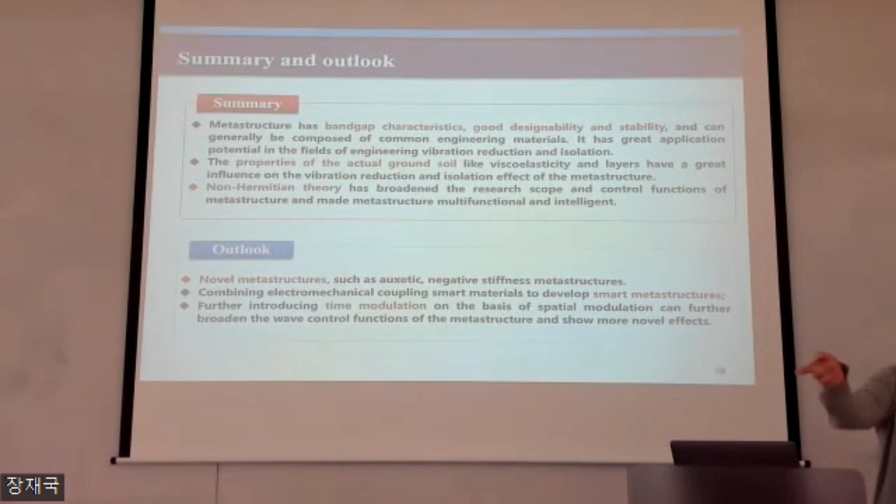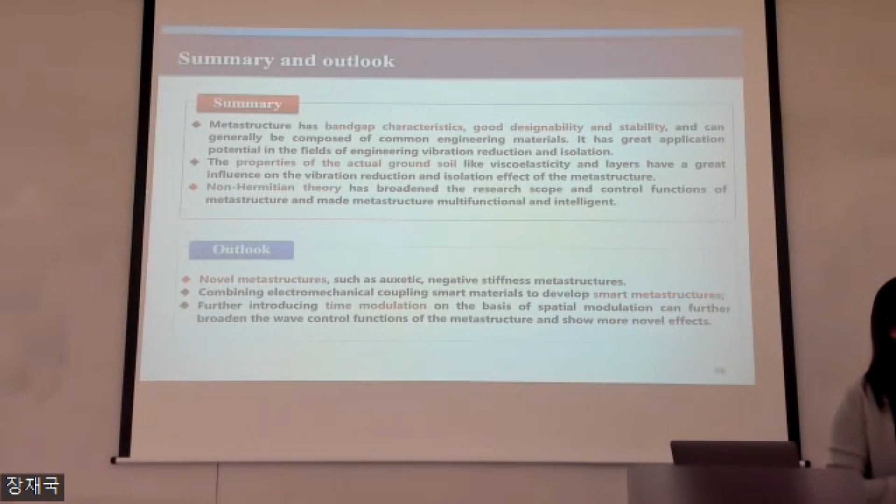Yes, I'm collaborating with the Fraunhofer Institute, EMI, where Timo used to work. It's the institute for impact and penetration. Exactly, the name is Kurzzeit-Dynamik, short time dynamics, high velocity. They are developing organic materials for armor protecting the organs of soldiers, so they do lots of experiments.

What I'm thinking is, we try to simulate the penetration of the projectile through the aluminum glass. At the same time, we could invent some auxetic structures to stop the penetration of the projectile. There are already several publications that try to use auxetic materials particularly for impact resistance and energy absorption. So we can put that material to Korean missile.

I think what is most interesting is when you have very sensitive equipment to low frequencies, like a semiconductor, or the people living nearby are complaining of the music and are very sensitive, then the cost is not a problem. Maybe you can apply it to semiconductor companies. Yes, my colleague has an ongoing project for MEMS, where they really want to reduce all the vibrations which MEMS and NEMS are sensitive to.

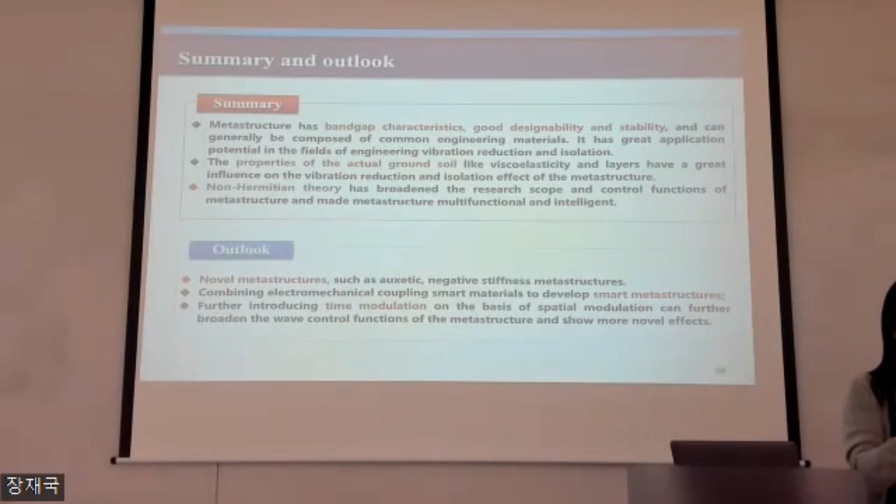In civil engineering, they want cheap materials. When I proposed fiber reinforced concrete, I said the cost for the concrete will increase by 50%. They cannot accept it. Actually, obviously, they can pay. So are they ready to pay more? Really? Yeah. Okay, good. Maybe using it in Korea. Yeah, let's think about it with both teams.